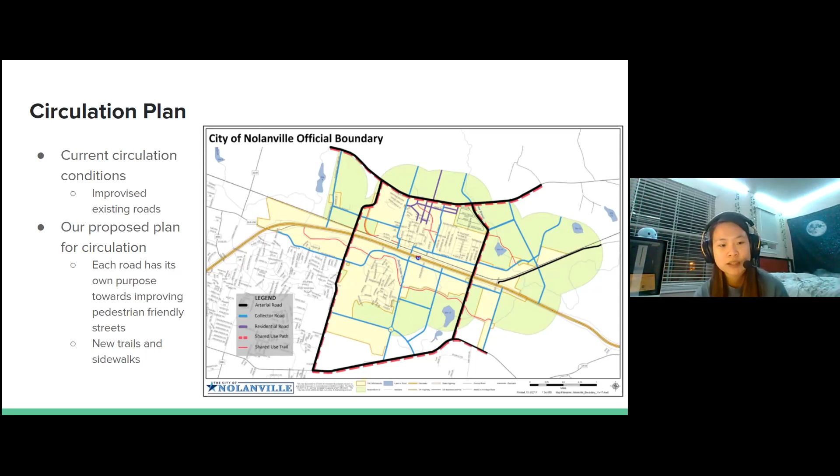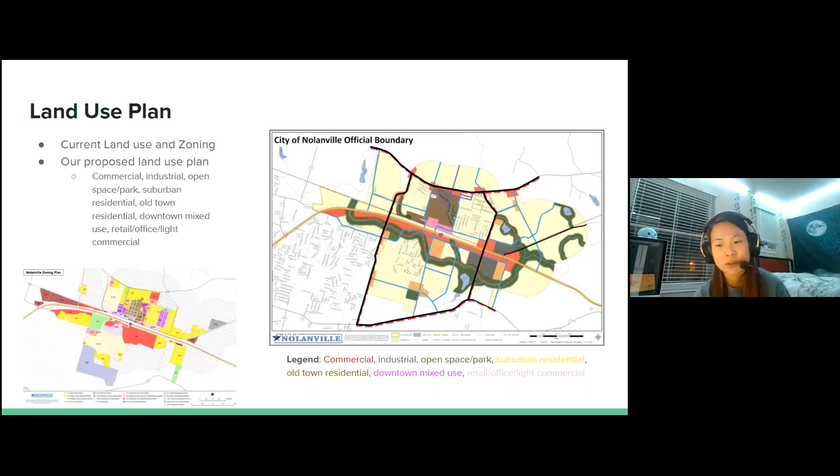For our land use plan, we showed the original zoning plan as well as what we plan to propose. We just have a list of the legend, and on the next slide we have a clear view of what our map looks like.

As you can see, our red is the commercial area, which we have lined alongside the highway to promote future businesses. We also have industrial areas, the gray area, which we have kept farther away from the main residential areas.

We also have open space and parks, which we have lined along the rivers to preserve the natural habitats. We also have suburban residential areas for families, and it's our way to promote more walkability. We also have Old Town residential areas where we want to preserve the historic buildings of Nolanville.

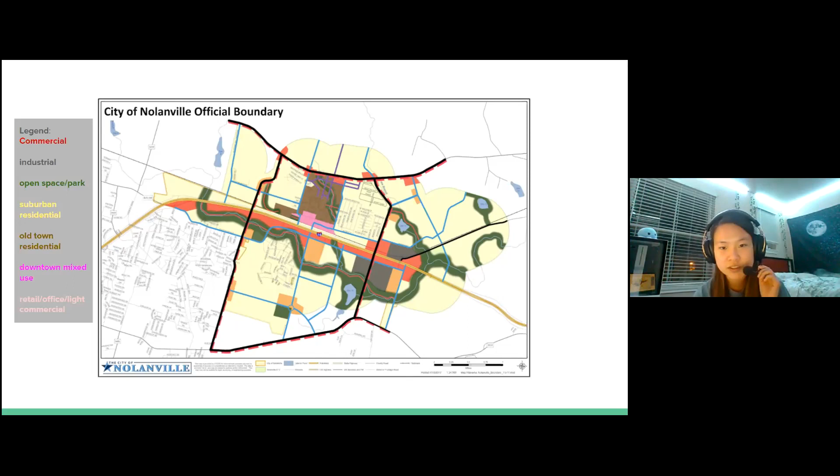And we also have our downtown mixed use, which is going to be our most dense area and what we'll be focused on for walkability. And we also have retail, office, and light commercial as the peach, which is going to be just towards the center.

Hi, I'm Agustin, part of the landscape team. One of the ideas we incorporated to better improve the walkability of Nolanville was to provide places and destinations to go. Here's a map of possible areas where we could implement some of those ideas.

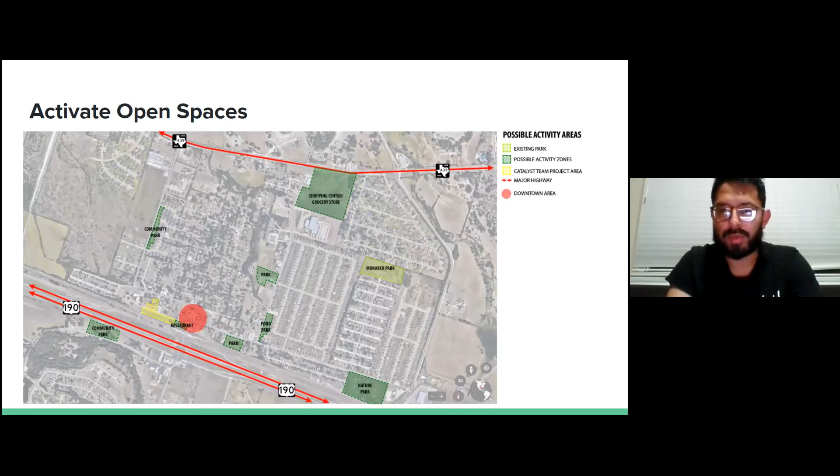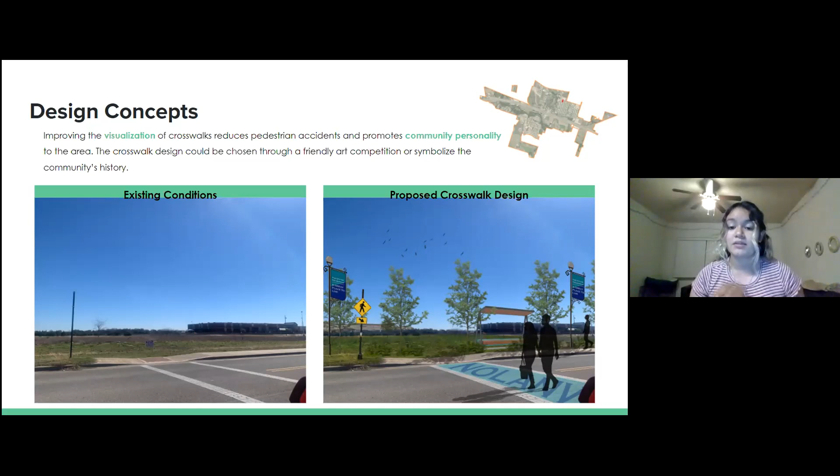Hi, my name is Arexy Deleon, also part of the landscape team. Some of our design concepts for the streetscapes are to improve the visualization of crosswalks to reduce pedestrian accidents, and to promote community personality in the area. Another thing is to propose more street trees to provide shade and seating, to give pedestrians a better experience.

Adding to what Arexy said, providing more crosswalks, larger sidewalks, street trees, and lighting will better improve the pedestrian experience and promote active living for residents and visitors.

One more thing we would like to incorporate in Nolanville is wayfinding, so that people, visitors, and residents can know where to go, where they're at, and what activities to go to and where to locate them.

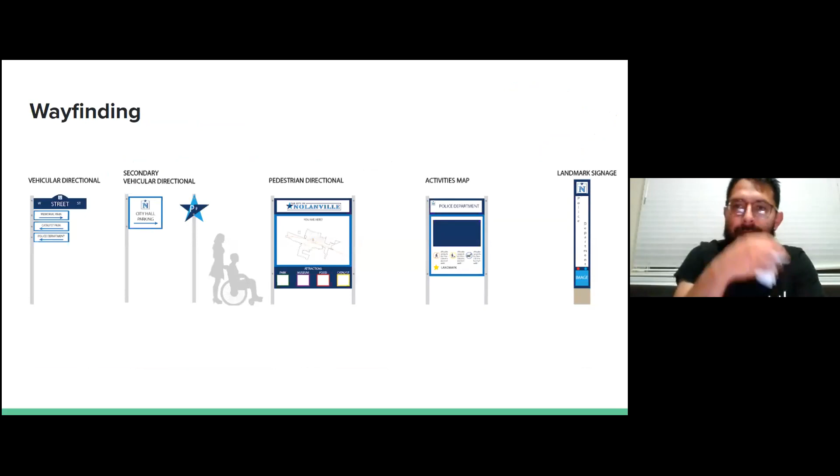We're also planning to incorporate smart wayfinding and signage for the future, so that we can strive for a smart city, and this includes signage that is technological and powered by solar panels as well.

So here's one of our site plans and concepts that we are providing. This site is east of the downtown area on East Avenue H, and this will provide residents and visitors a place to visit and promotes walkability through that.

This site promotes community identity by implementing Adopt a Brick and Adopt a Bench throughout the site. We have also provided a shaded plaza, amphitheater, seating area, a memorial plaza, and a nature trail walk to the site where people can enjoy the outdoor space and spend more time in the downtown area of Nolanville.

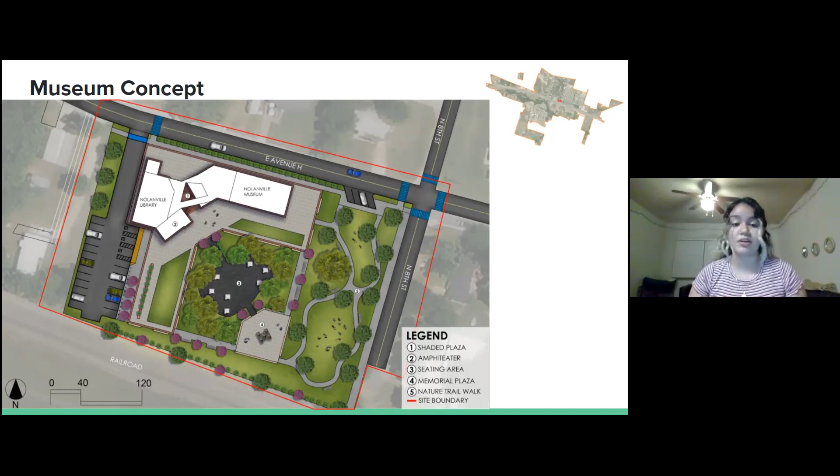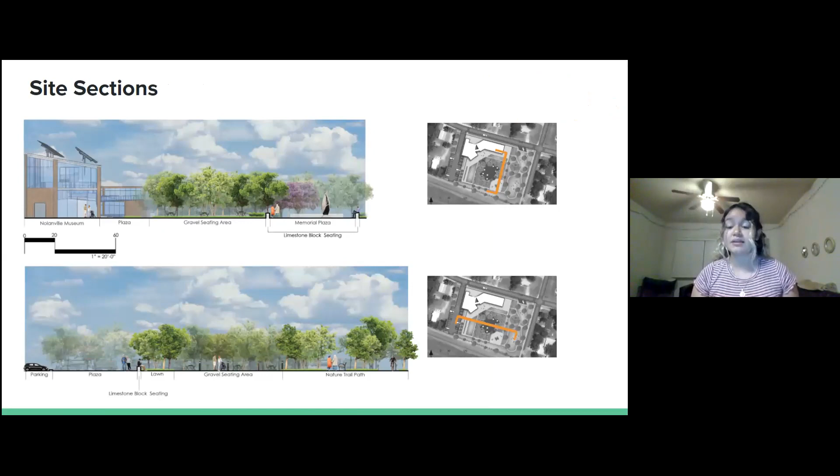These site sections show how the building transitions into the memorial plaza. We have provided plenty of shade, seating area, and vegetation, and it is ADA accessible all the way throughout the site.

Here you can see the Nolanville Museum and the library as you walk.

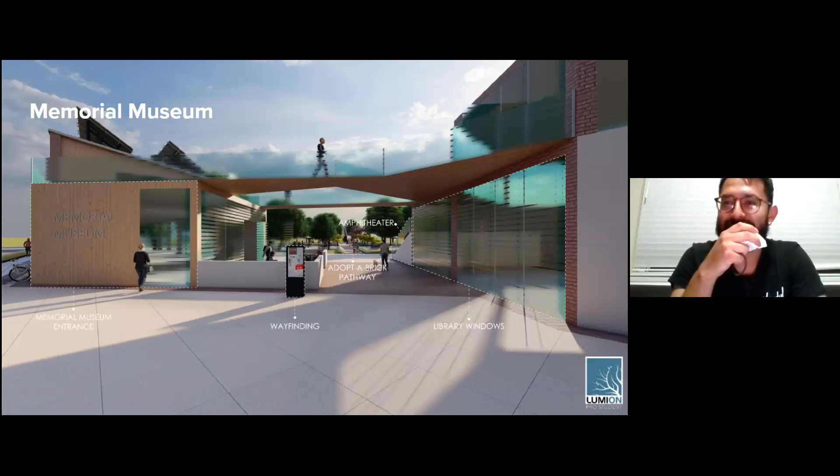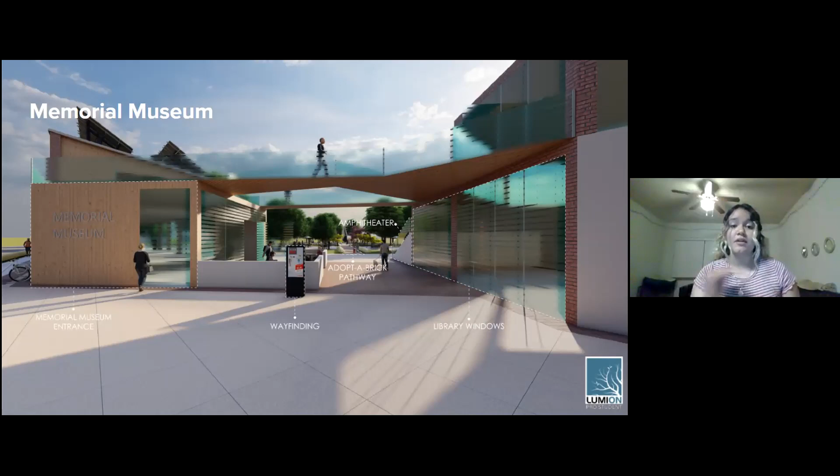So this, as he mentioned, has the wayfinding and the Adopt a Brick pathway, and the overhead provides shade to the site, and it is what you see as soon as you enter the site itself.

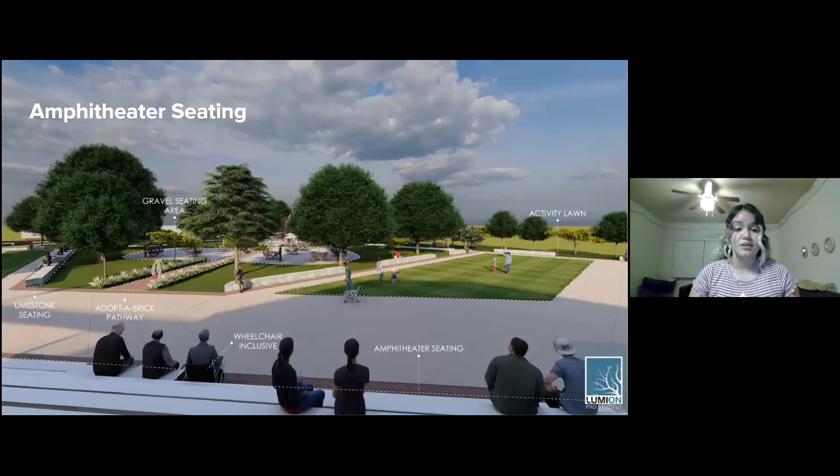Then as we lead towards the amphitheater, you're able to sit down and view the entire area in the shaded position. So you can see the Adopt a Brick pathway, gravel seating area, and the activity lawn.

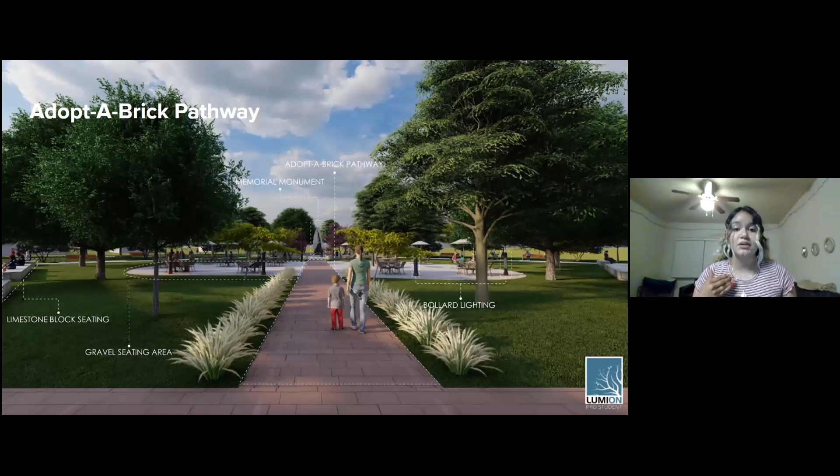And then here we have the Adopt a Brick pathway that leads to the Memorial Monument. Around the area, we have limestone block seating and bollard lighting with outlets, so you can charge your phone and relax, spending your time there.

Hello, I'm Peter Marchetti, and I'm part of the data analysis team. One of the goals we set at the beginning of the semester was to determine which features are most detrimental to the walk scores of Nolanville.

We wanted to be able to bring these to the attention of the Nolanville city officials so they could try to make some changes. This will serve as well as proof of concept to an interdisciplinary proposal on future land use.

So what is a walk score? A walk score measures how feasible and desirable walking to different destinations is from one location to another. In Nolanville, this is really important because most people of all mobilities and economic statuses should be able to access jobs, shopping, and leisure. Cities designed solely for vehicles inhibit this goal.

Our walk scores were calculated using several of the existing features and statistics that exist in Nolanville. On a scale of 1 to 100, 100 obviously being the best, these scores reflect how suitable a town is for walkability.

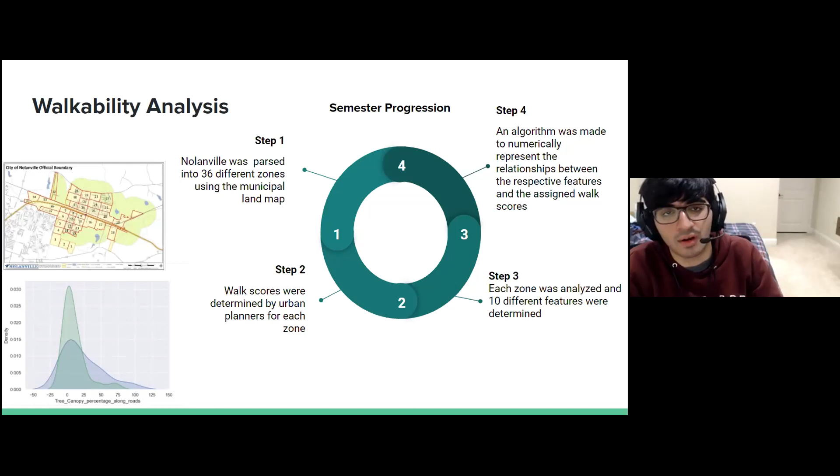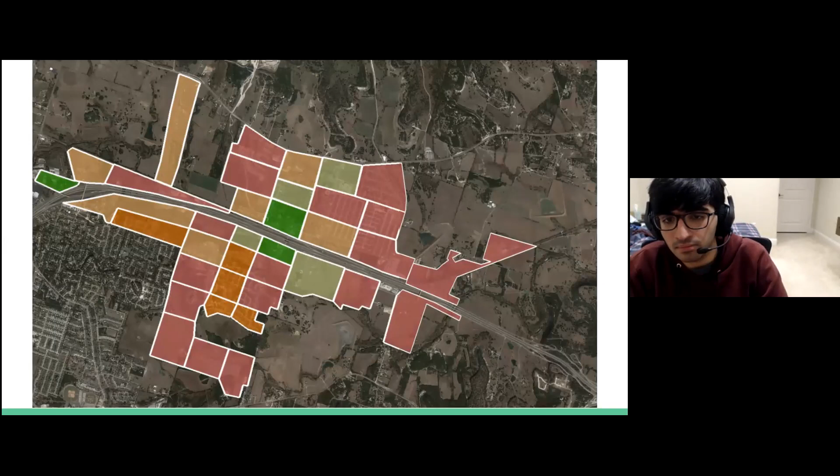In our walkability analysis results, we found a Pearson correlation of 0.68, which points to a correlation between the features we collected and the walk scores we also calculated.

Some of our findings were that agricultural land use is not actually a good predictor of walkability. This may be due to how we collected it or calculated how much land use was due to agriculture, which included empty space, and also due to how prevalent it is in Nolanville.

The best correlation between walk score and our features was found using commercial land use, land dedicated to parks, and the number of blocks spanning sidewalks, which we found to best demonstrate a strong positive correlation.

A one-stop website, we want to include all that empirical data that we've just presented, all of those renderings that could potentially be seen in Nolanville in the future, the design code that would make that future possible, and the land use map, which would determine the circulation and the types of land usages across the city.